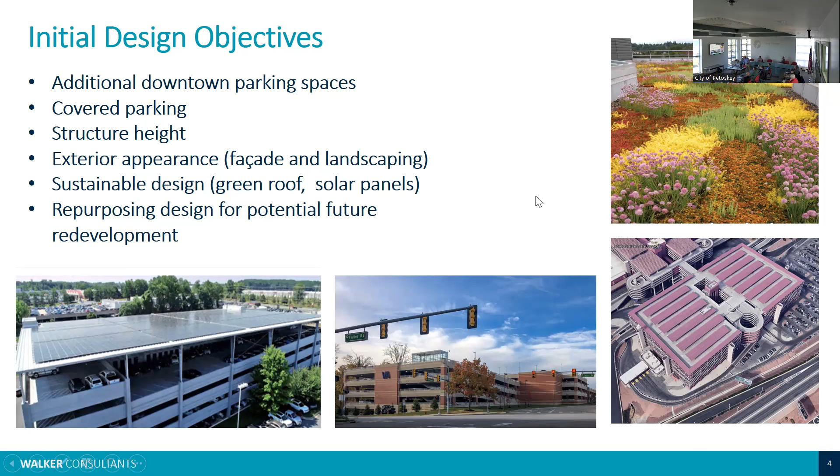Click the screen, try to move that bar. Now try the arrow. There you go. I always appreciate the high tech that we have with us the whole time.

Let's go to the conceptual parking layouts. Rick, will you walk us through those, please? Sure.

Question: why stop it right before the 26 spaces in the alley—is it just that we can't use that space for the alley? Answer: Right, if you look at a parking module, you can fit two bays in there, but not enough to get through, as you'll see in the next slide. So it makes sense just to keep them there.

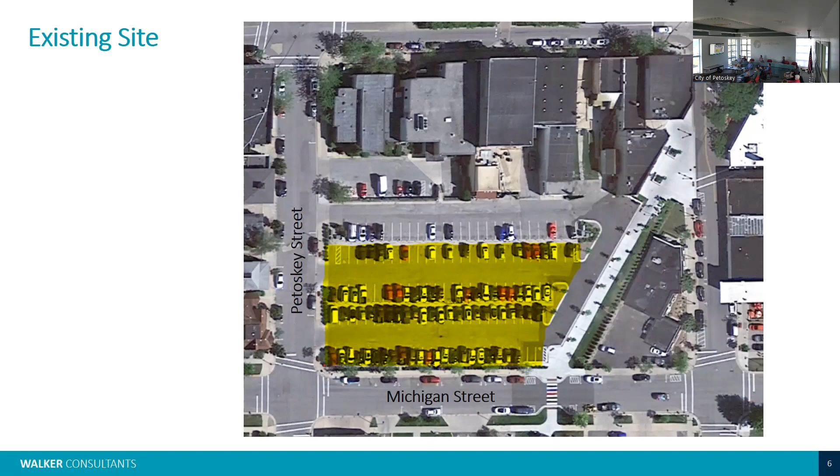Looking at the site, the high point is right here, and if you walk on a diagonal towards the northwest corner, that's the low point—it drops about 10 feet. Also, walking along Michigan Street towards the corner, it drops 4 feet, though you don't really notice it. Then along Petoskey it drops a bit more, about 6 feet in that direction. So that gives you the lay of the land we're working with and how we're going to tuck those two levels in there.

It also lets us put stair towers in this corner here. It allowed us to put those on the outside of the footprint of the structure so we can get as many spaces as possible in the interior.

The circulation is pretty simple. It's 2 bays, you just make one loop. We chose to do a counterclockwise loop, so there's no crisscrossing of traffic at the entrance, and no parking conflicts. You go out to Petoskey, up Petoskey, and up Michigan, and now you're on the upper level, and you would enter right here.

One point I'd like to make is the first level that Rick showed you does require some extensive excavation. You'd have a basement wall along the south side, a basement wall along the east side, and a basement wall along about a third of the wall on the north side. As the grade diminishes in both directions, sloping down towards the northwest corner, you start having openings here and here. That has implications - you're going to need fire sprinkler and mechanical ventilation because you don't have enough openness.

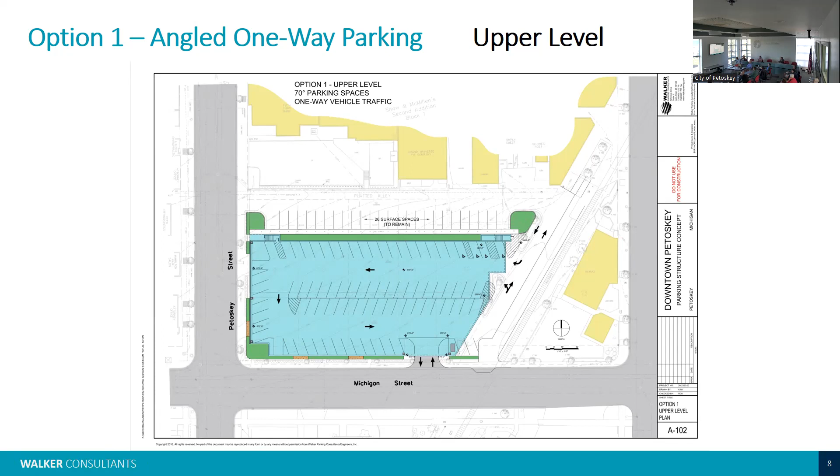Also, just to give you an idea how the height of the structure varies as you go around it. If you were standing right here, the only thing sticking up would be the stair tower right here. And the stair tower is going to stick up about 10 to 12 feet, depending on what type of roof you put on it.

And if you're standing in this corner over here on the sidewalk, you're at the lower level, you've got the upper level up here, and above the upper level, you have the stair tower that projects up. So probably in the neighborhood of about 25 feet, similar to some of the houses across the street.

And if you're standing in this corner right here on the sidewalk, we already talked about how Michigan Street angles down about 4 feet, and our structure picked up a couple of feet, so we're going to be about 6 feet higher than the sidewalk on this side, plus you'll have a 3.5 foot wall around the perimeter as a vehicle barrier. The rendering that Jake's going to show you will help illustrate what we're trying to describe.

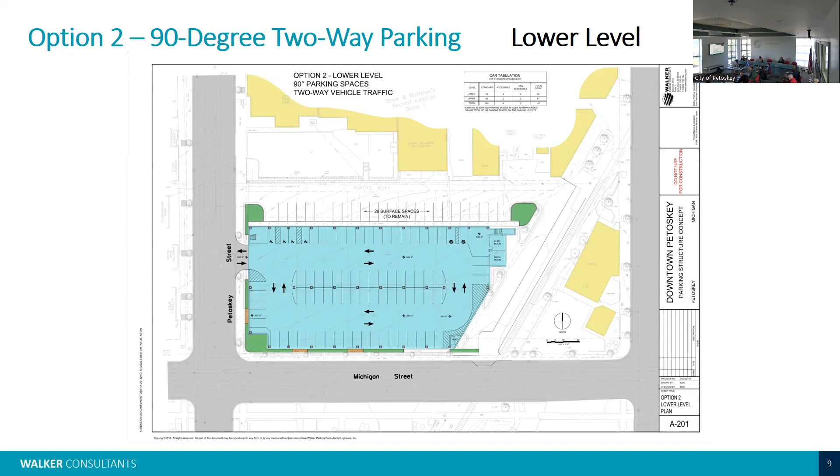Okay, design elements. We'll talk about covered parking first.

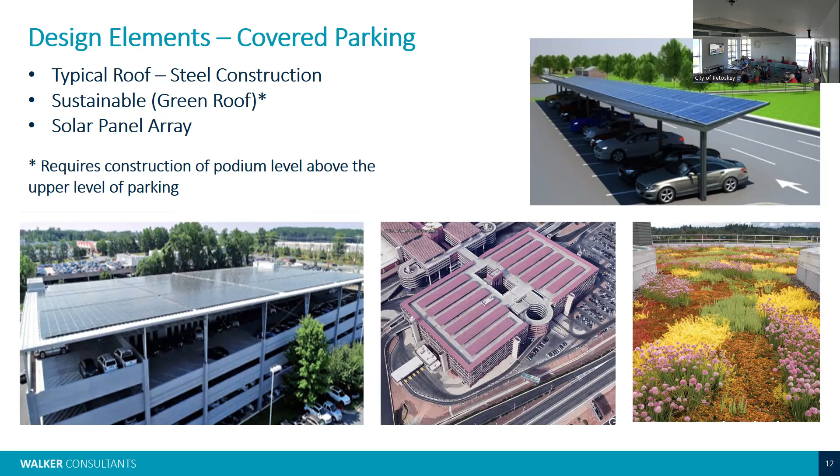Let's talk about steel roof. These are things that are all in the mix of making a decision about whether or not you want to do something like that. It adds height. If you take what we are presenting now, the platform parking structure, you're going to add maybe 14 to 18 feet, depending on the pitch of the roof. Yeah, okay, so you're adding height.

Any roof you put on over this supported level will have to be engineered all the way down to the ground. Footings will have to be more robust, columns, that kind of thing. Additional lighting - you obviously have to light now the supported level.

There will be annual maintenance and repair costs. If you go with a steel roof, you'll have a steel structural system, or we could go with concrete and steel system. But then you also have the roof itself and the trusses and all those things. You would have snow and ice control for the parking. If it's only over the parking space, your aisles are open, so you will have to have snow and ice control maintenance at that time.

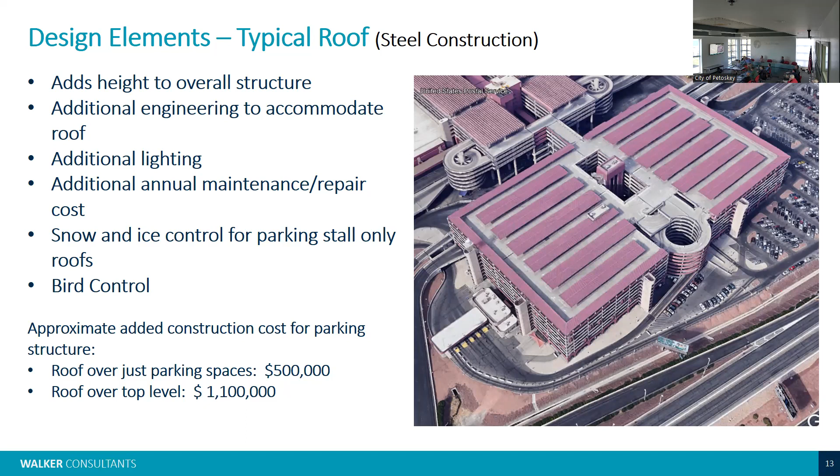Green roof. Again, it adds height and takes a lot more additional engineering. You really are putting in, in our trade we call it a podium structure. That is a specially engineered structure to carry the loads that the rest of the roof requires.

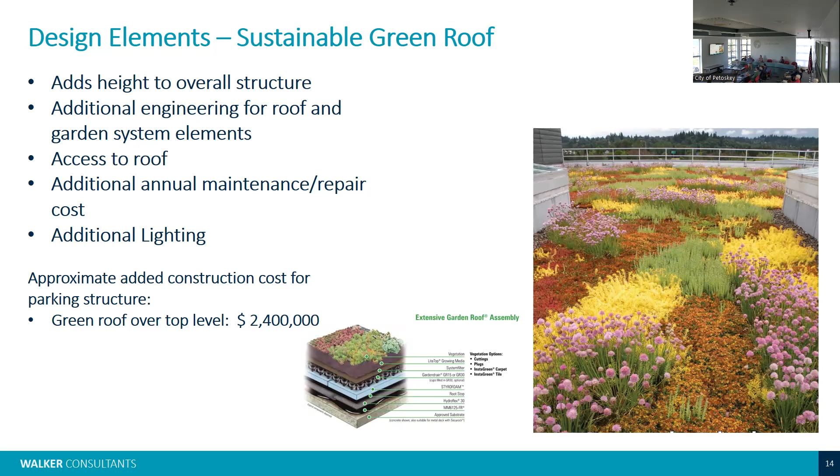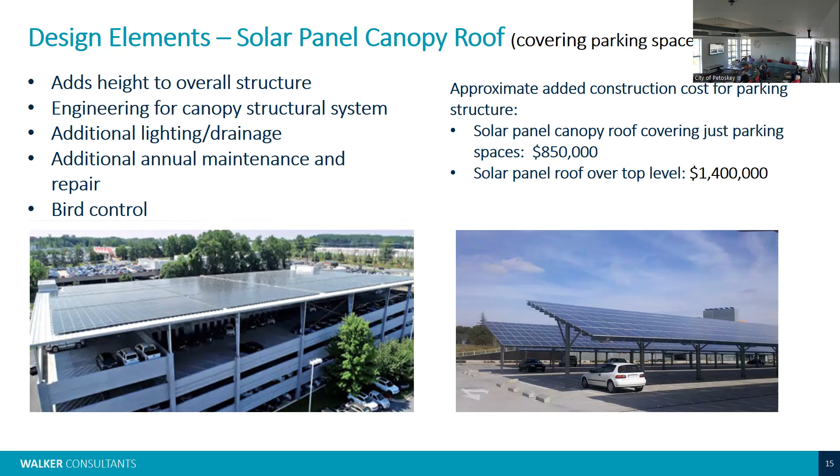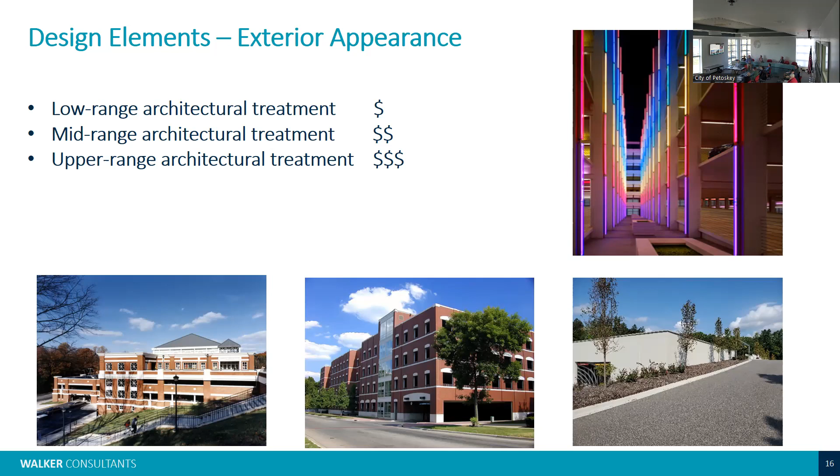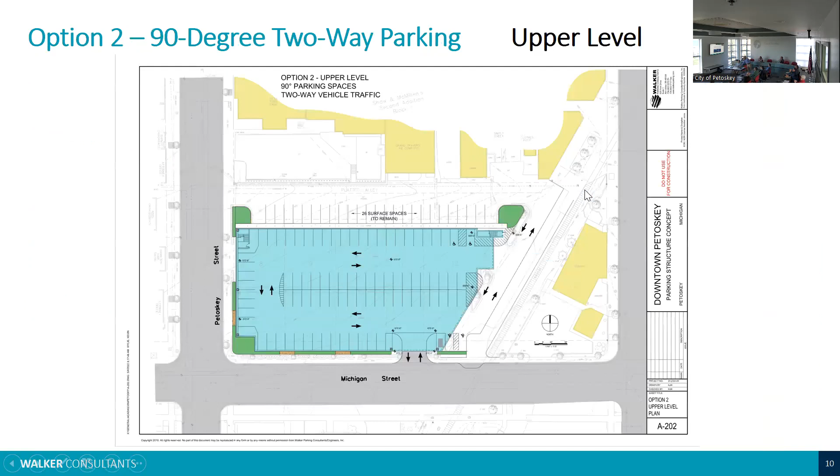It's not letting me go back. I'll try it. No. Is it stuck again? Yeah, here it is. I apologize, Sarah, I got a sticky finger.

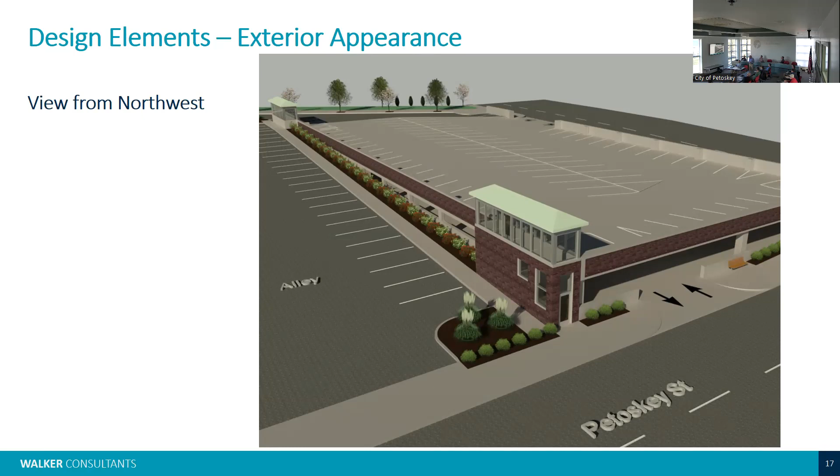Let's go to the next one, Rick. I have one question. In these renderings, which are all very nice, did you take into consideration how people are paying for their parking? Are each of the slots metered, or will it be an arm? Well, we did not put in parking access control equipment. We did that for a reason.

Yes, you could put meters in there, but what I'm thinking is a multimeter, like the Elks Lot has. That way we can keep everything nice and clean, and you don't have the meter maintenance, that type of thing. And you lose a lot of spaces too. Several spaces, you lose, yeah.

On this one thing you'll see, we did a cutout at the lower right corner there that softens the edge. It gives a little bit better sight lines at the intersection right there. And again, there is landscaping that goes along.

That again is the angled version. Those elements that I'm pointing out will be there with the 90-degree two-way. And this shows what I was trying to describe, how the street drops down about 4 feet, and the structural slab rises a little bit. So you have about a 6-foot difference between this floor slab and this sidewalk at this corner, and also about a 3.5-foot barrier wall along the outside, along 3 of the sides.

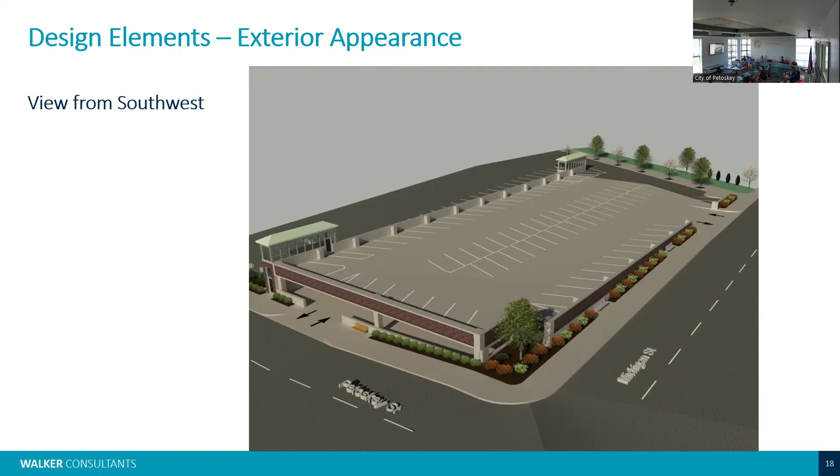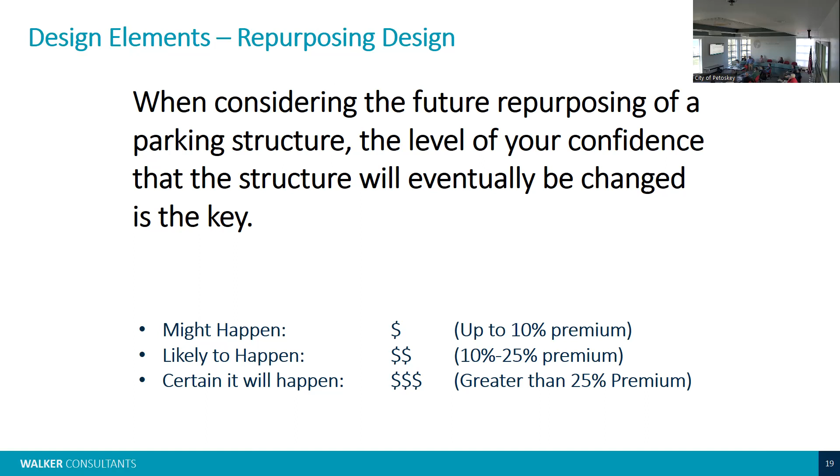If you're absolutely certain it will happen, it's going to cost you significantly more. We have not run across anybody yet that has said we know for sure in 25 years this is going to need to be a classroom building, for example. I haven't seen that. This right here is only just a tiny bit of the types of things you have to look at and pay attention to.

There are many other things you can do with that, but yes, you can do adaptability.

May I ask a question? Yeah. I'm just going back to the solar roofs - you gave us like a 1.4 million for the total roof, 850K for the partial. Do those numbers include the extra prep you need for the footings for the entire structure? Yes. Okay, that's good to know.

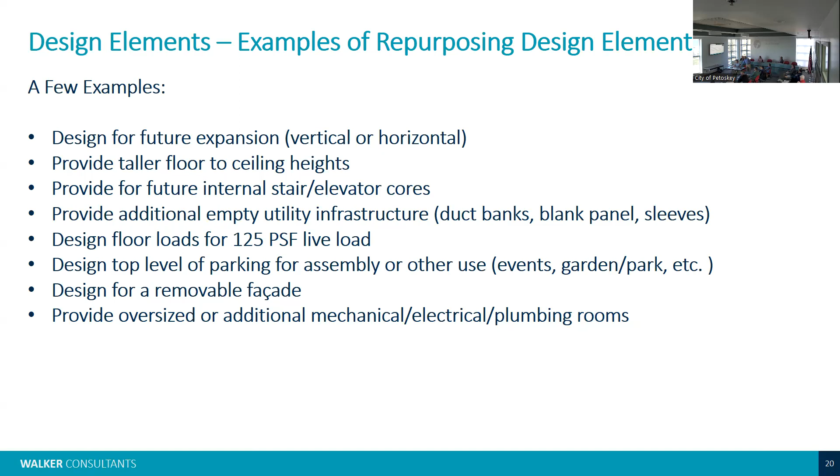Unless there are any questions, we're coming to the end of the steps we will take in this project. I'm hoping we've given you enough information. And by the way, if you think of something...